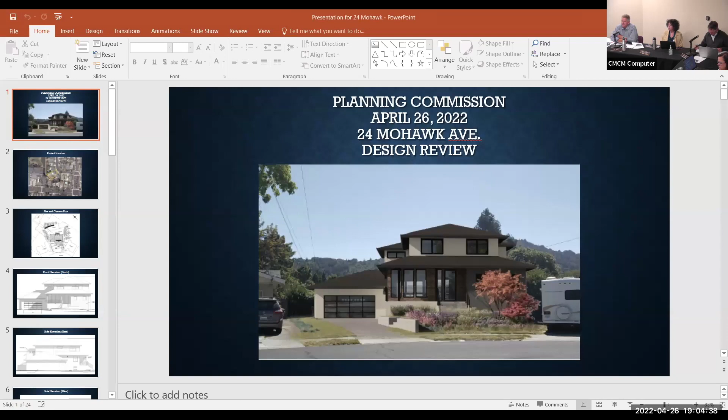Thank you. Tracy, if you could bring up the PowerPoint, that would be great. Good evening, Chairman Chase and members of the Planning Commission and members of the public. I'm Phil Boyle, Senior Planner with the town. As Chairman Chase mentioned, this is a design review application for a brand new 2-story home at 24 Mohawk Avenue. Let me see if I can get our clicker working.

There it is. So the project is located in the southern part of Madera Gardens, shown on this location map. It's a quite large lot for the neighborhood, pie-shaped, given that it's on the exterior of the curve of Mohawk Avenue.

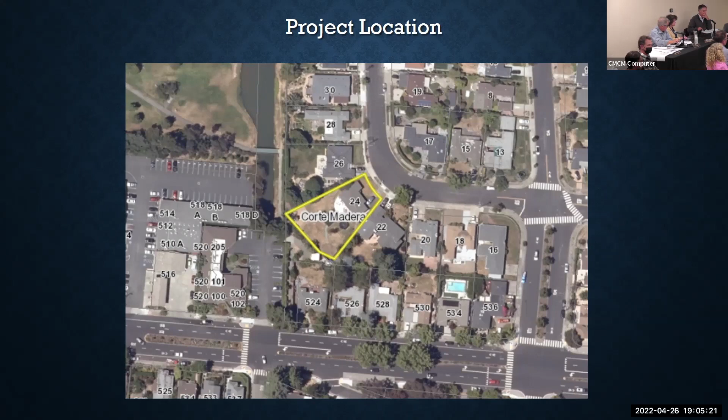The second slide is a little more detail, the site and context plan. This shows where the proposed building is on the site in relationship to the street and the 2 homes on either side. I'm calling the home to the left to be on the east, which is 22 Mohawk, and the home on the right, 26 Mohawk, which we're considering west. Front is north and rear is south. It doesn't exactly line up that way, but that's the language we'll be using tonight.

This shows the setbacks on the left and right, which are 6 feet, the front setback, which is 20, and the rear setback is 25. Those are the code requirements, and I'll go into detail exactly where the house lies in relation to those setbacks. So that's your site and context plan.

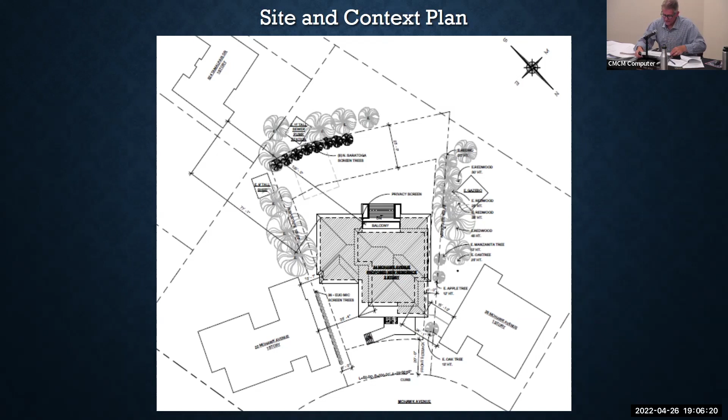Next, giving an overview of the 4 elevations. Front elevation, again north, consisting of the 2-car garage and the front porch. You'll notice the several stairs going up to the front door because this home is being raised to meet the FEMA floodplain requirements.

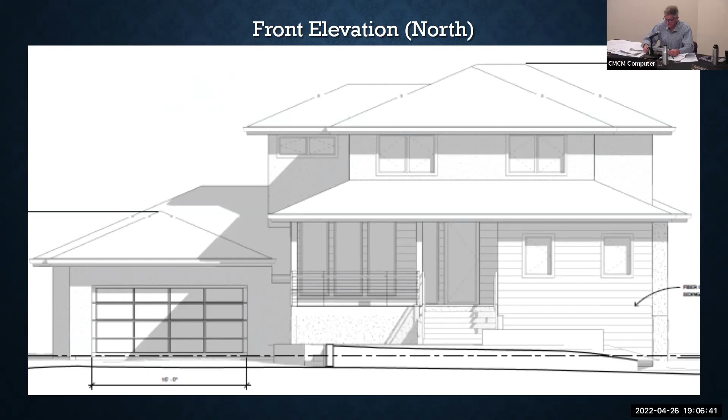Just giving a general overview of elevations first. Moving along to the east, or side, elevation. This is where you'll see the left side of the 2-car garage, which is a single-story element to the structure. Beyond that, additional rooms, the great room window on the right, and then a bedroom and bathroom window on the second level. So that's your east elevation.

Along with, on the upper left, you'll see a privacy screen, and that's for the second-level balcony off the rear elevation, to provide privacy to the folks to the east.

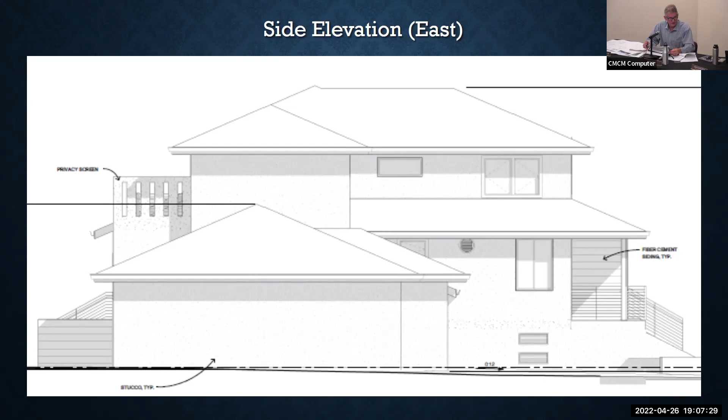Moving next to the next side elevation, the west side, and this is facing 26 Mohawk. On this, we have basically a two-story element completely throughout. However, as you can see, the second story is set back at various levels to provide some articulation, so you don't have a solid massing of a 2-story wall. Our side elevation disappeared.

Huh. I'm still here.

Thank you, Tracy. Trying to go to west, trying to go to rear elevation. Amy, can you push it one more, Tracy? There we go.

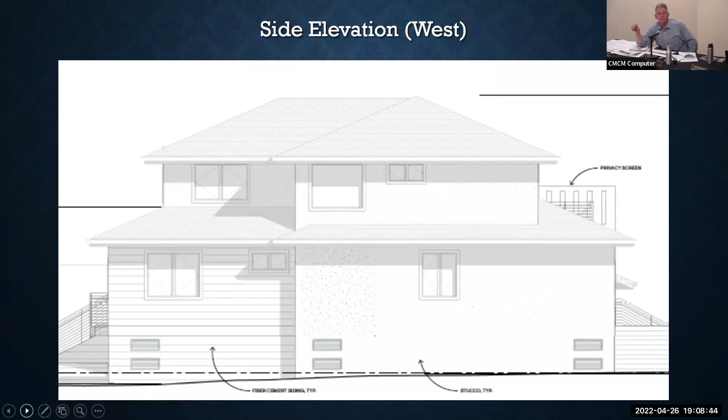Okay, so our rear elevation, which we're calling oriented south, consists of another garage door - this is the back, a second garage door in the back of the garage. The applicants had this in a previous version, allowing them access to the garage for outdoor equipment, lawnmowers, whatever they wish. Moving over to the left is the back patio leading into the great room with accordion glass doors, and windows to the right of that. Then to the left, the study area has 3 windows.

So again, you can see the elevation that's required with FEMA. As you've noticed, the garage is not required to be elevated, so that's at grade. You can see more completely the second level balcony looking out off of the master suite, and again that privacy screen on the east side.

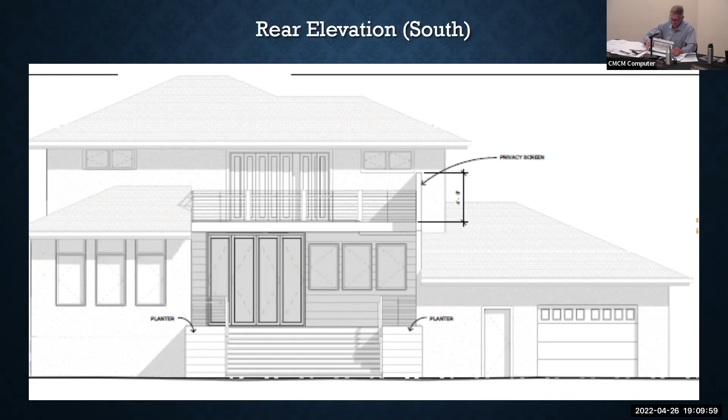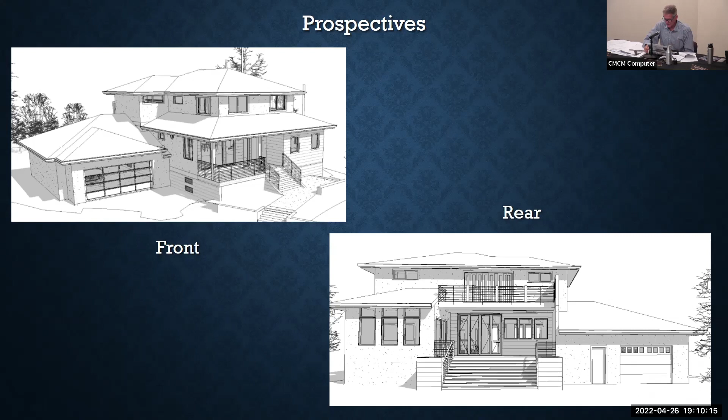Just to get a sense of perspectives, these are 2 perspectives that the applicant has provided - one from the front looking up, front left, and then the other of the rear elevations.

Now moving into more specifics, the first level floor plan. This consists of the main entryway, the front porch, the great room, which includes kitchen, dining room, and living area. The front right has a guest bedroom and a guest bath. Moving back to the middle of the building, you have the stairway leading up, and the pantry. In the back right is a study with a closet as well.

So certainly could be a bedroom. You also have a covered back deck, as well as stairways leading to the backyard. This also gives you a perspective of the garage, which can easily accommodate the 2 cars as shown, plus some additional depth beyond those cars for storage.

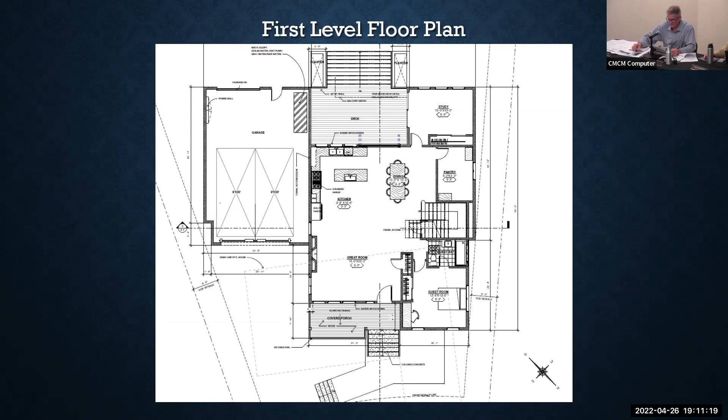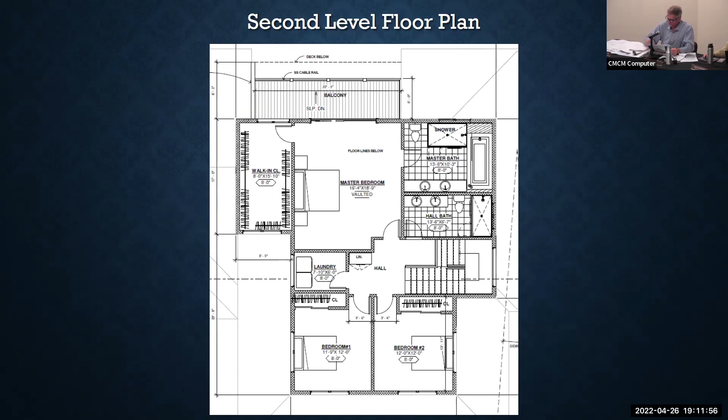In terms of overall project summary, the project in terms of FAR and lot coverage and a number of things - quite a change, going from a very small 985 square foot home that exists today to a much larger home. Your floor area ratio is going from 8% to 35%. The code allows 40%. The lot coverage is going from 8% to 25%, and again the code maximum is 40.

Setbacks: currently the building is relatively close to the front property line, at 15 feet. Actually, I think it encroaches in because the front setback is 20. So the existing building is existing non-conforming, too close to the street. The proposed building will be 35 feet from that front property line. Side elevations are relatively the same - existing on the west and proposed on the west is 6. Existing on the east is 8, proposed on the east is 6. Rear elevation currently 84 feet away and proposed to be 43 feet away.

In terms of height, I'll talk about this in a little more detail, but basically we have a single story home today at 13 feet, and the proposed building height is 29 foot 5 inches. The code allows a maximum of 30 feet for building height. Current parking is 1 covered space, and proposed will meet code at 2 covered spaces. The project meets all requirements of the R1 zoning district and there are no variances being requested.

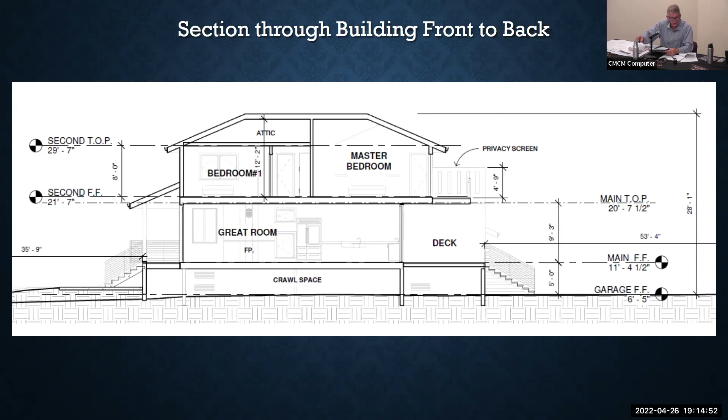So we have a maximum building height of 29.5. Ceiling heights are listed there, which I just mentioned. Garage ceiling height is 11 feet, which I just want to point out - probably not a typical garage height, as far as I know. Crawl space, again, to meet the FEMA requirements is approximately 5 feet in height. Roof pitch is 5:12, and that attic space is 4 feet. So it'd be relatively accurate to say that the ceiling height in the master bedroom vaulted area is probably in the neighborhood of 12 feet, but I'm sure the applicants will correct me if that is not correct.

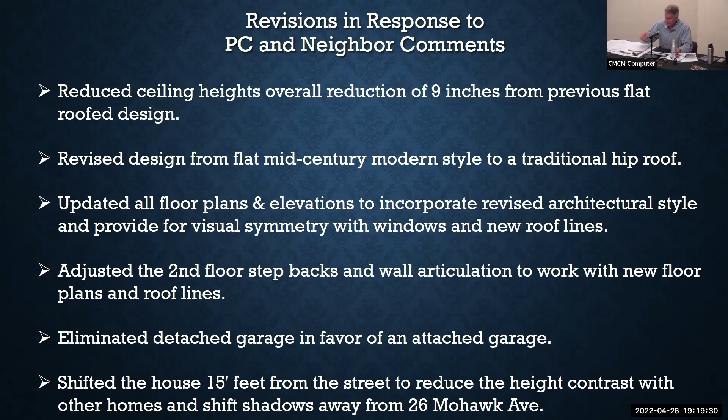So I'll go into a little bit of discussion of the shade analysis. I went into quite a detailed discussion in the staff report - these are kind of the high points. Obviously, as I said before, 26 Mohawk to the north is the most impacted. The most shading that is cast upon 26 Mohawk is happening in the winter months, December to March, and predominantly between 9 a.m. and 1 p.m. And again, this is based upon the shade study that's in your packet. Like I said, the house was shifted back to try to pull the shadows off the roof, and I did a rough, quantitative analysis to try to give you a sense of how much shading is being cast upon.

If one was to look at about 3/4 of the year, during a day and 10 hours of that day, there really is not a noticeable amount of shading being cast upon 26 Mohawk, in my opinion, looking through the shade study. So in spring, summer, and fall, about 10 hours out of a 12-hour day, there's not a noticeable increase in shading. Conversely, in the winter months, when the sun is much lower, which is approximately 1/4 of the year...

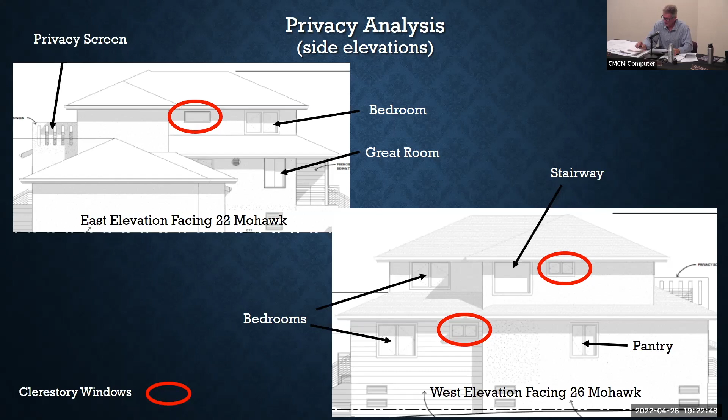Again, with this analysis, staff was viewing these and was able to draw the conclusion that though there are impacts to views of the skyline and the blue sky above, there are no peaks, slopes, ridge lines, or significant architecture or natural features being obstructed by the proposed project, while looking at the story poles.

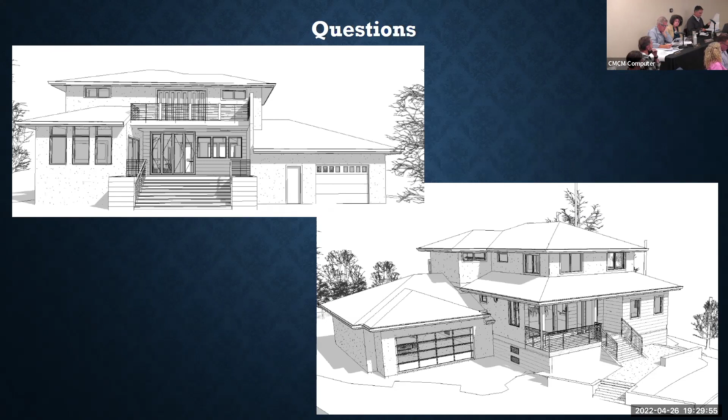Yeah Phil, the 5/12 slope for the hipped roof, is that the same on the garage also? It looked bigger, or looked like it might be different as I looked at it. I'm pretty sure, I'll quickly find the page. Pretty sure they're all the same. Yes, if you turn to sheet A-1, and I have all these electronically if you want me to pull that up. Sheet A-1 shows that all of the roofs are 5 and 12s, including the garage. Thank you.

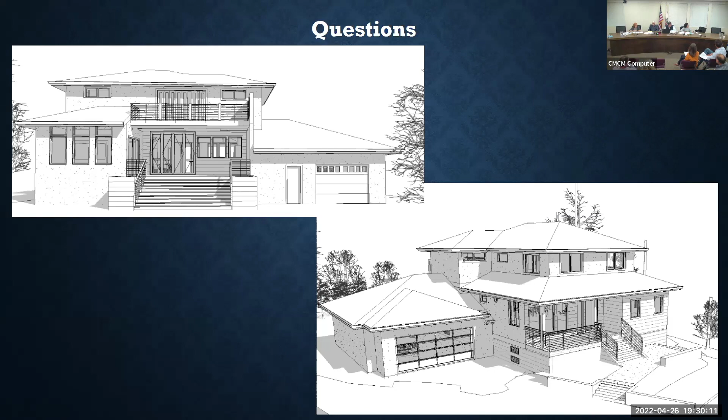I'm just wondering, in a crawl space, when it has to be raised by FEMA, is that crawl space usable for anything, or does FEMA say it has to be vacant? FEMA says it has to be vacant, so you can't use it for storage or anything like that. I don't think FEMA would care if you put a ladder and various things, but your heating and cooling system can't be in that area. So they basically don't want anything that can be damaged that they'd have to pay for. It's non-occupiable space, right? Yeah. So the garage does not have to be raised, for example. It's similar to that, it would be not conditioned space or occupiable space.

And when you raise the house like that, is the floor of that crawl space finished in any way? I'm just curious. There's no regulation. Again, it can't be finished to be occupiable, it's up to the owner if they want to finish it. Some people finish it with a light coat of concrete for rats and other problems, things just like that. Okay, thank you. Thank you, Margaret.

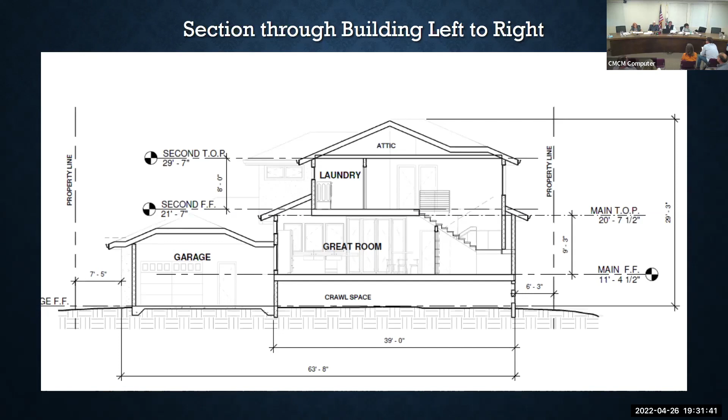Thank you very much. We have timed this, so we won't take too much of the time. I know at one point we went really long, so we're trying to be expeditious here. My name is Britt Sales, and this is my husband, Spencer Sales. We're the applicants for 24 Mohawk. Also, we have Alan Sales here, he is our architect of record, and yes, he is Spencer's dad.

To reintroduce ourselves, we're a young family. We have a 7-year-old son and a 2-year-old daughter, and we're looking to raise our family in this residence. We moved from Corte Madera—we moved to Corte Madera from San Francisco in November of 2019, and we rented in the neighborhood on Seminole.

And we really grew to love the neighborhood. We like the family friendliness, very safe. We felt very comfortable raising our kids in this neighborhood. When 24 Mohawk came up for sale, we were very excited and we were able to purchase the property back in June of 2020.

I'm a full-time technical program manager. I work in the tech industry. I do work from home ever since COVID and for the foreseeable future.

Spencer is a senior construction project manager. He works in the Marin and Sonoma counties. He will be working from home from time to time, but typically he's out in the field.